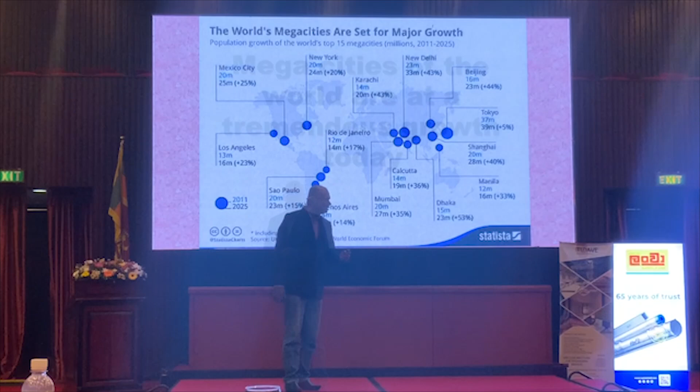Okay, so the good thing is, as Mr. Shuramal also pointed out, the mega cities of the world are at a tremendous growth today. So these are some of the mega cities. He showed what's happening in Colombo, but if you look at even New Delhi from 2011 to 2025, there has been 43% growth in New Delhi, and there has been 53% growth in Dhaka, and we have Beijing 44%. Even the developed countries like New York, we have 20% growth. So mega cities are at tremendous growth.

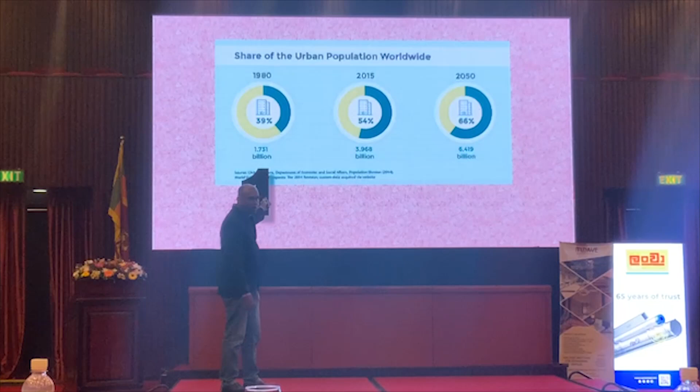And billions of people are today moving into cities. It's a good thing because knowing or unknowing, by doing so, these people are contributing to make our world a more sustainable place. So this is the world urban population. By the 1980s, we had 1 billion people living in cities. And 2015, or right now, we have more than 3 billion people living in the cities. And it is estimated by 2050 we will have 6 billion people. Look at the numbers, 3 billion now, 6 billion in just 25 years.

So by 2050, we need cities for 3 billion more people. Right now we only have 3 billion and we need cities for 3 billion more people. So it's just doubling the global urban population. And few people understand that this is the biggest force working on Earth today, the biggest force. All these bright dots in the world are cities, and they are going to double in size and grow twice in just 25 years.

So it's the biggest movement on Earth, and as professionals we have to make sure that we do it in a sustainable way. We direct these people, settlements and all in a sustainable way. Unless we do that, there's a problem. So we need cities for 3 billion people and we have to get it right. If we are not going to get it right, all these climate solutions we are talking about, we have the green building chairman here, all those solutions are not going to save the planet. So this is the most important thing, right?

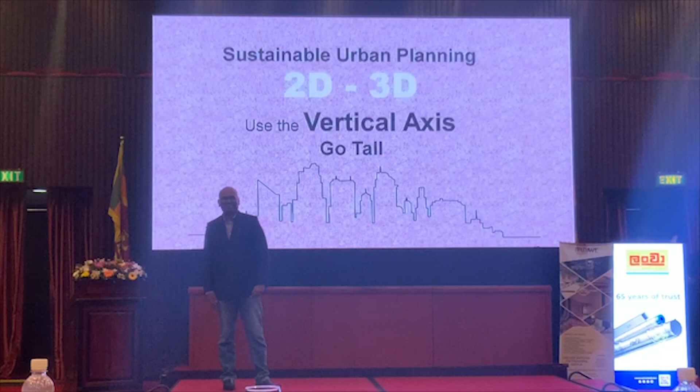So we need sustainable urban planning. And we cannot think about cities two-dimensionally as earlier we thought, just plans. We have to have 3-dimensional plans for cities. We have to use the vertical axis and we have to go tall. There's no other option. So that's why we need tall buildings today. So he's now happy. Okay, but the second question is, okay, we can go high, but how tall can we build? How tall can we build? What is the maximum limit? This is a 10-meter tall building.

It's a 10 meter by 10 meter cube. So if I make this 10 kilometer by 10 kilometer by 10 kilometer cube, I think everybody agrees with me. In this small cube, 3 people can live happily. It's a big cube. So if we scale it up like that, I think we can house all these 3 billion people we are talking about. So it's big enough to do that. But can we do this? Can we build this kind of a cube? Is it possible?

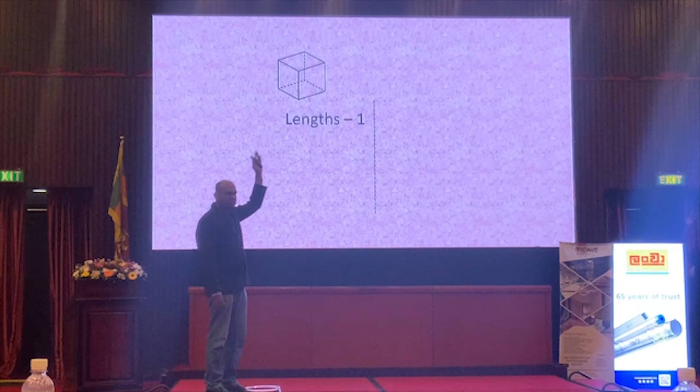It cannot be done. Why? It cannot be done due to a very, very fundamental basic reason. I'll explain what it is. So this is a simple cube. Its lengths are 1, whatever unit, it doesn't matter. And its density is 1. So the weight of this cube, I think everybody can calculate it. It's 1 by 1 by 1, that is the volume times the density. That's the weight of this.

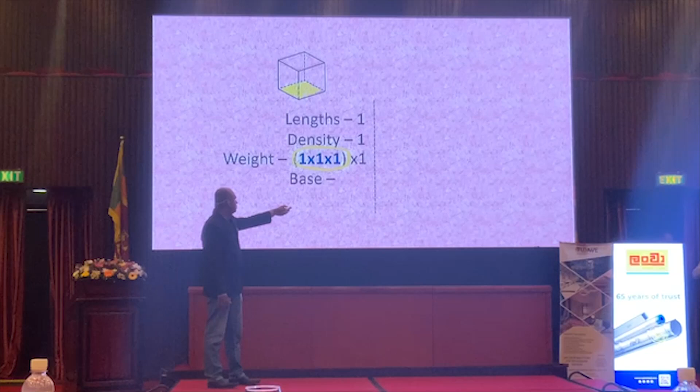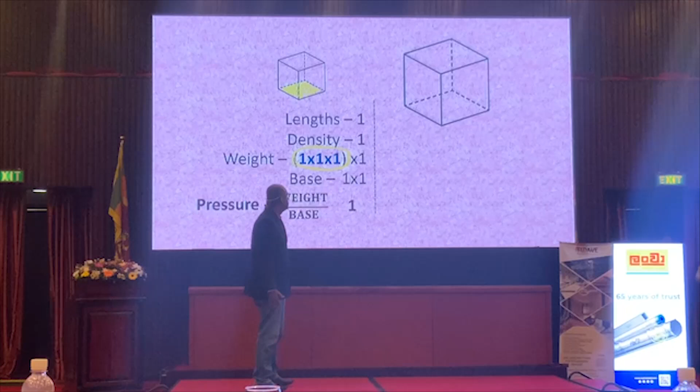And I'm talking about this base area of this cube, which is 1 by 1, it is 1. And I'm interested in the pressure. What is the amount of pressure that is going to be there at the base? So it's the weight divided by the base, and we get 1. What happens if I scale this up? If I make this bigger, 10 times bigger, let's say. If I make this 10 times bigger, the length is 10 by 10 by 10.

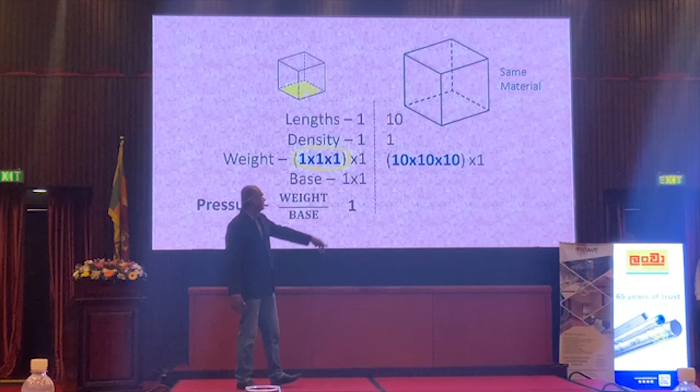And if you make the same cube of the same material, its weight is going to be, I have to press this hard, isn't it? Yeah, it's 10 by 10 by 10, 1,000. But the base size is only 10 by 10. So what happens? The pressure becomes 10. So you can see the same material, same structure. When you just scale it up, you get 10 times pressure on the base.

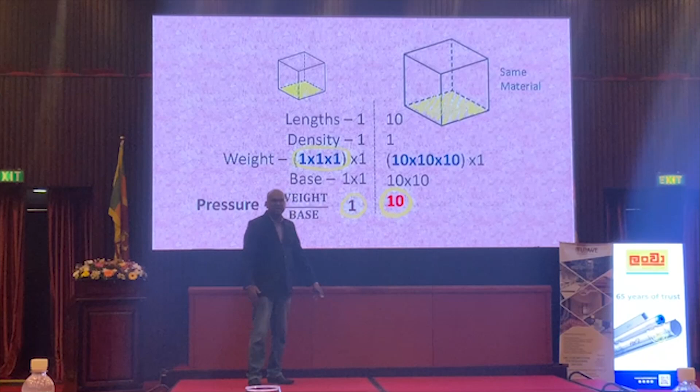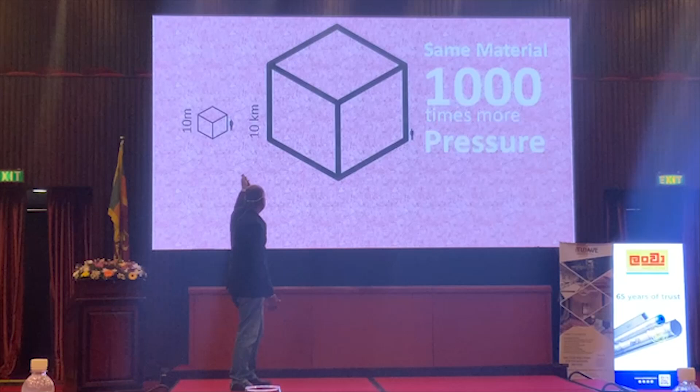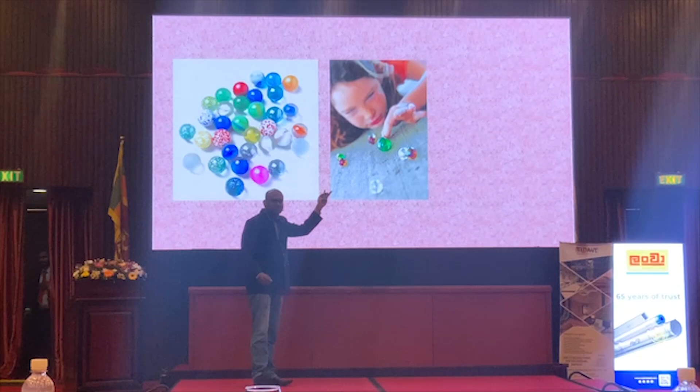So when you have this 10 meter building, when you scale up to a 10 kilometer thing, what will happen? We will have 1,000 times more pressure. If this is a concrete building, these foundations are going to have 1,000 times more pressure. So what happens? These things collapse. So we can't construct such buildings. I think you have played with these glass balls when you were small. When you drop it on a cement floor, it bounces up. What will happen if you drop this kind of a glass ball? It smashes into pieces. Why? Just because it is big.

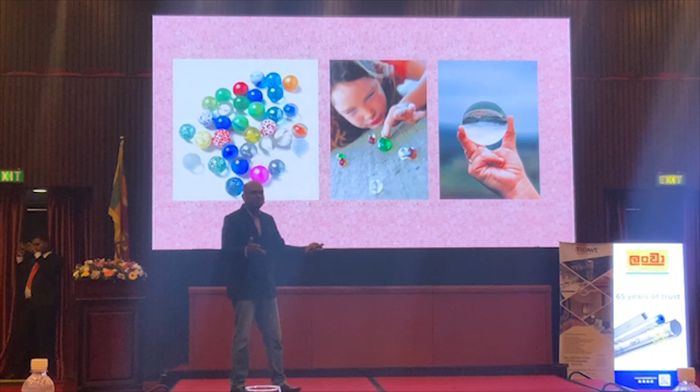So even if you look at a building, it's the same thing. A 1 meter building, I think you have made models like this at the university. You can make this kind of a fancy model, but you can't do it at 100 meter height. It collapses. Right. So therefore, designing tall is not easy. It's a difficult thing. Okay. So the reason is, when we are talking about tall buildings, we are working at the threshold of collapse. That's the important thing we have to notice.

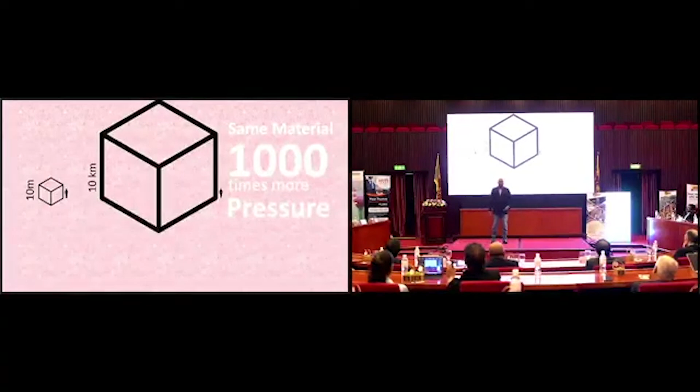Right, so architects can't do it. These kinds of things architects can't do. So 1,000 times, this 10-kilometer building, nobody can do. But we have people who can do, let's say, a 1-kilometer building, because breaking this pressure barrier is possible.

So for example, today we are bringing Professor Priyan Mendis, who is an expert on that, a world eminent scientist who has discovered high strength concrete to design foundations of tall buildings, and he has contributed to many world class buildings. So that's why I just pointed out this.

So that's the physical limitation of designing buildings, the physics limitation. Clever people like the Professor can handle that a little bit. But that's not the real limitation in tall buildings. In tall buildings, we have the efficiency limitation, or most importantly, what I call the sustainability limitation. So what is this efficiency limitation? It's very important to understand, so I will go a little deep into that.

So just think of a tall building as a bottle like this. This bottle we have to fill, and also drain off. Fill with what? We fill it with people, we fill it with water, and we have to drain off sewage. That's what we are doing with tall buildings. And the challenge is we have to do it in a given time called T.

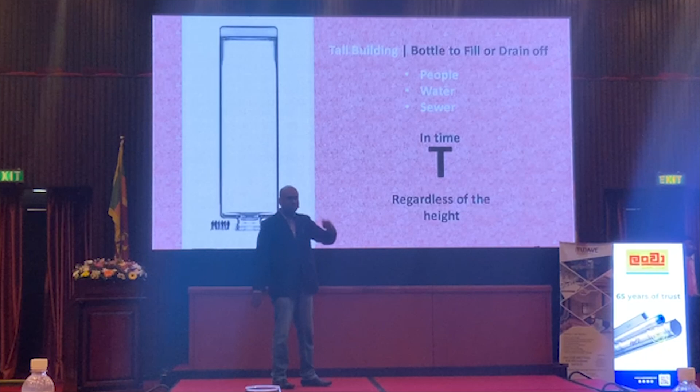Because my building is very tall, I am not going to go to the lobby and wait, let's say, 10 minutes till the lift comes, because I respect it's a tall building. No. Everybody wants to get to their office in 2 minutes, regardless of the height of the building. So T is a constant, we can't change it.

So this is the bottom area of the building, the cross-sectional area, I call it capital A. And let me number the floors: first floor, second floor, third floor, up to the nth floor. Then the volume we have to fill is A times n. It's clear for you, isn't it?

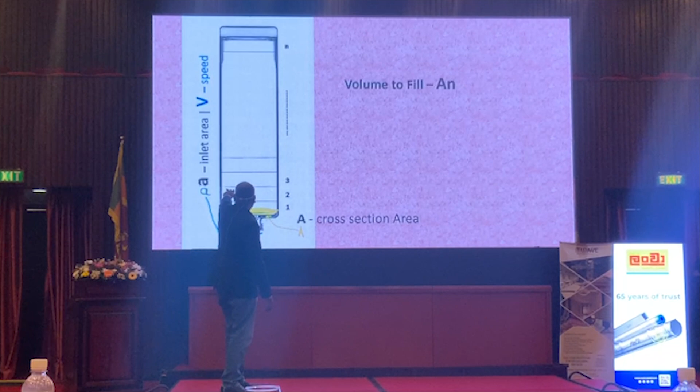This is the inlet of the building, where you put things inside. That area I'll take as small a. And the speed we pump things up, I'll take as V. So our flow rate is a times V. It's clear for everybody, I suppose.

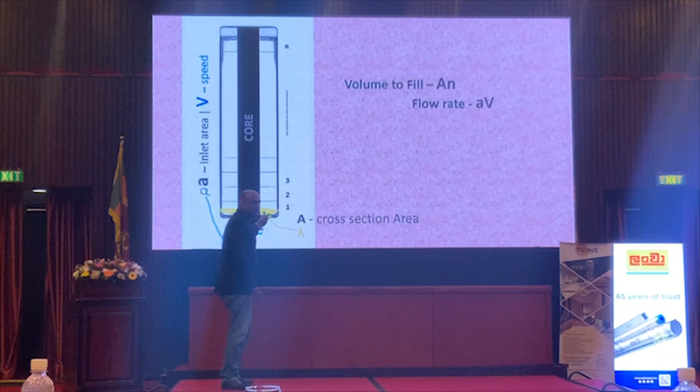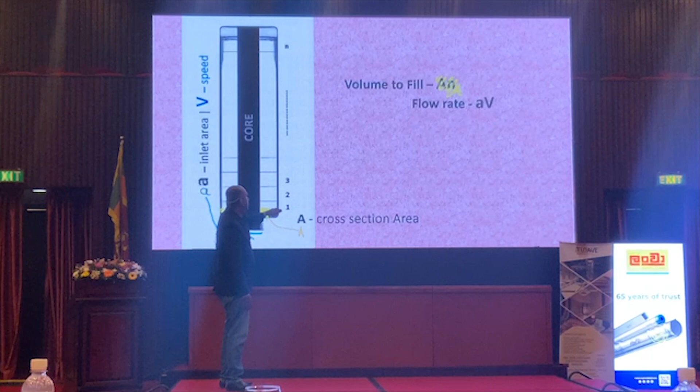But there's one difference between a bottle and a tall building: there is a central core. So you don't fill it like a bottle. You bring things through the core and then fill in. So it is not correct to say A times n is the volume to fill. It has to be capital A minus small a, times n, because we are filling only the sides.

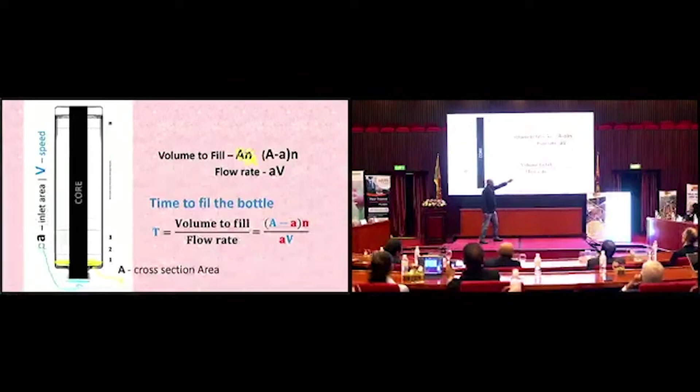So you can now calculate the time to fill the bottle. It's very easy: the volume to fill divided by the flow rate. It's (A minus a) times n divided by a times V. That's all, very simple. So let me keep this up there. I have just changed the order of it and taken the a out.

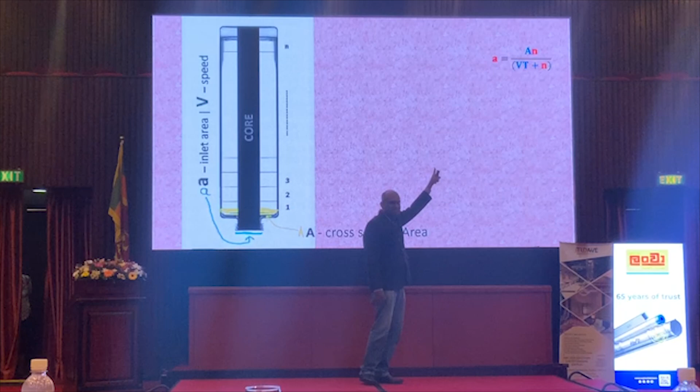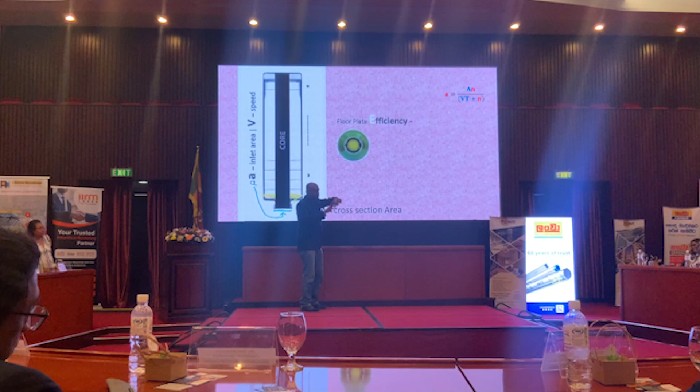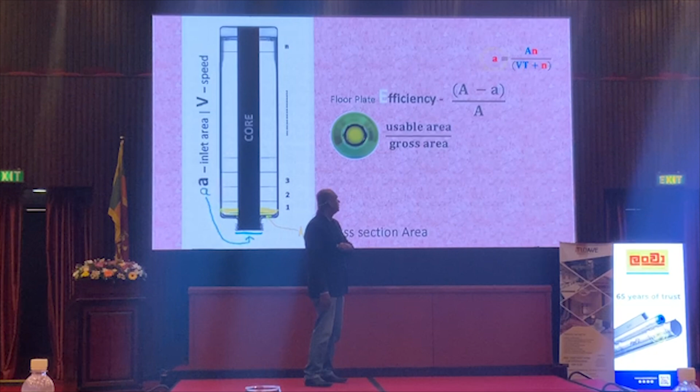I talked about this because I want to explain the efficiency of the tall building. It's very important. So the efficiency E is the usable area divided by the gross area, which is A minus a divided by A. So I'll take that a I calculated up there and put it here, and we get a very simple equation: E equals VT over VT plus n.

It's a very simple equation. You can work out the workings; I'm not going to do that, so you have to believe me that it is so. So what does this equation tell us? It tells us something very, very important about tall buildings.

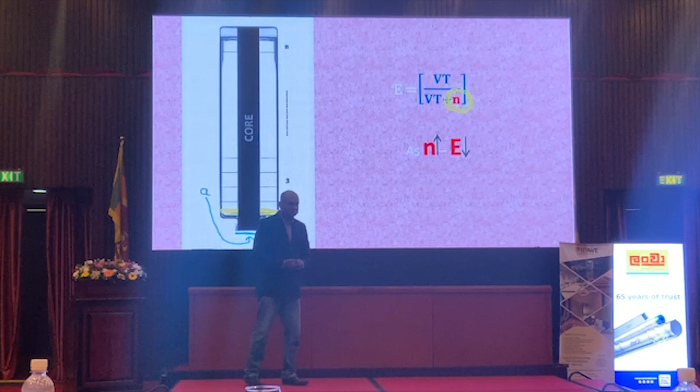When the N increases, the efficiency goes down because they are inversely proportional. That's something simple. When you look at this, you can very simply understand. As the height of the building goes up, tall buildings become gradually inefficient, little by little. But that's not the most important thing. There are other important things you can look at when you look at this.

Where is this A we were talking about? The cross-sectional area. It's not there. So what does that mean? Regardless of whether you have very large land or a small land when building a tall building, it doesn't matter. Efficiency is efficiency. So whatever the building you build, efficiency is going to go down. It's a very drastic thing about tall buildings.

And then this is something very important. How to increase efficiency then? If you are going to do a tall building, the only way is we have to work with this thing called Vt. T is a time, V is a velocity. We bring people, water, those kinds of things up the buildings. Here we have to increase it substantially because this Vt is upstairs and also in the denominator. So it's not a direct relationship. We have to increase it sufficiently and substantially, and that is not so easy to do. It's very difficult to increase the efficiency.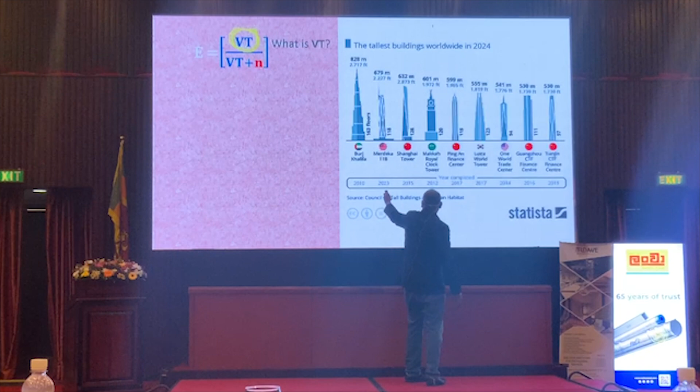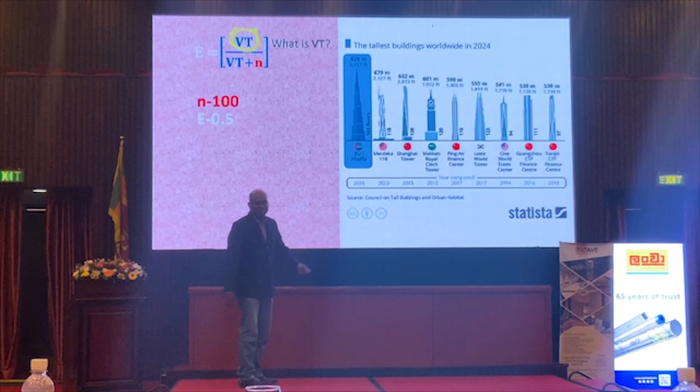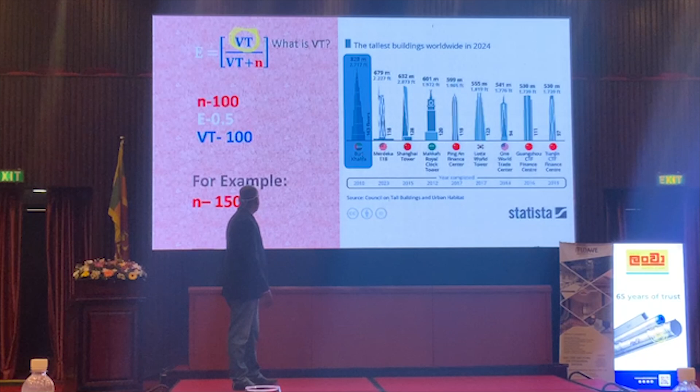So if you want, I can calculate this Vt very easily in front of you. These are the tallest buildings in the world. Let me keep this Burj Khalifa out of the picture for a while. All these buildings have 97 floors, 111, 94. I'll take it as 100 floors. And I know the efficiency of these buildings is about 50 to 60%. I'll take it as 50, and when you put these numbers, I get a number for Vt. It is 100. A very simple number. Now you can use this to, for example, calculate the efficiency of a 150-floor building. If you put the numbers, you will see it's only 40% efficiency.

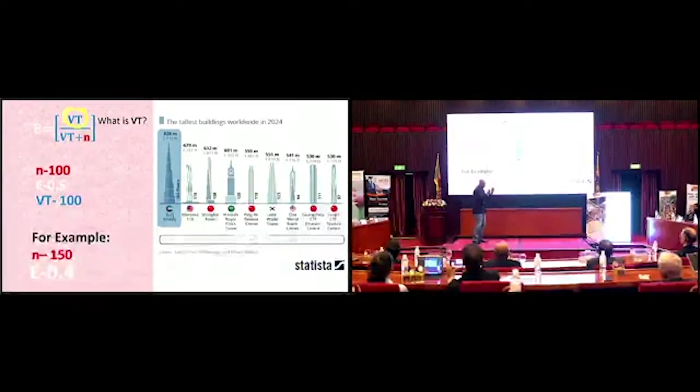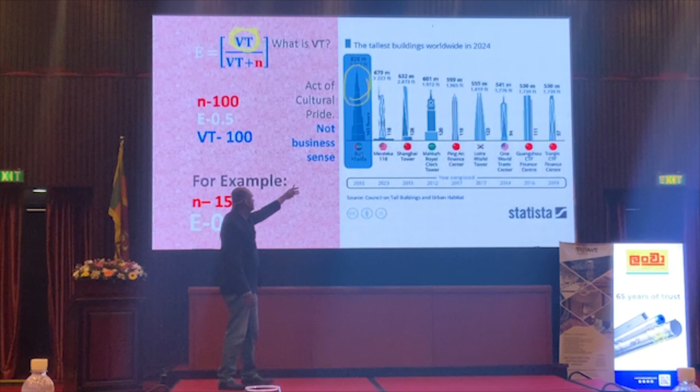Burj Khalifa, I left it out because its form is different. It's a cone form. Actually, its efficiency is much less than a normal tall building. A professor has worked on this. This top part, if you calculate it, is highly inefficient. So it's not a business sense building. It's actually a cultural pride. Just to say we have the tallest building in the world, it's done like that.

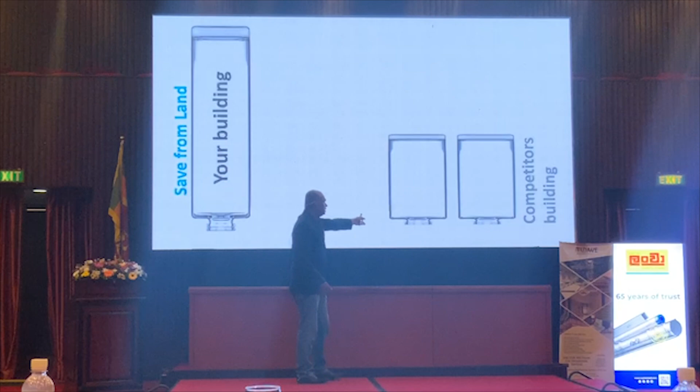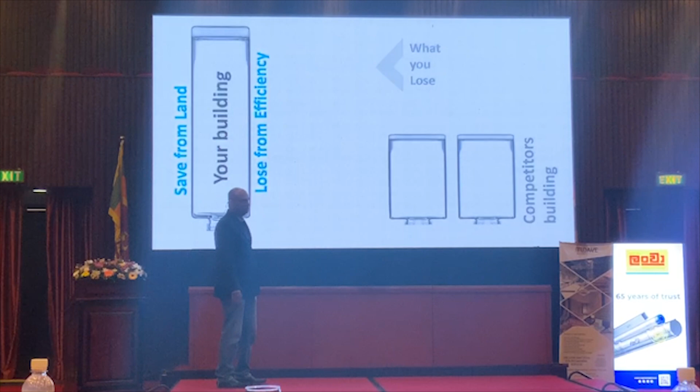So in simple words, we'll just forget mathematics. This is your building, and this is your competitor's building. Two buildings, the same usable area, and you save from the land. When you're doing a tall building, your competitor is using a large amount of land, and Shirom will explain that. You are using less land. But you lose from efficiency. That's the problem we have. When what you lose is much more than what you gain, you lose. It's so simple. You lose in terms of business, and even in terms of sustainability. So that's the failure of tall buildings we see.

And although we, CTBUH, also boast about tall buildings, the super talls always fail. We have Nakheel Tower, 200 floors. Professor, has it started construction? No, just on the drawing board. We have Sky City Japan, 196 floors, just drawing board. Nothing has happened. And we have Jeddah Tower: they started, did the foundation, stopped, restarted, and once again they had to stop it. We have Dubai Creek Tower, 160 floors, started, and as far as I know it's stopped. I could show some examples in Sri Lanka as well, but I shouldn't. So there are a lot of projects like that.

So as far as we know, the super tall always fail. The reason, I think most of the people in the world don't know, but now you know what the reason is. Okay, so going vertical is a challenge. So that's why I just explained this. It's a challenge, and that's why we brought an experienced person like Adrian to tell us how to face these challenges in tall buildings and also convert these challenges into opportunities.

So we were talking about this efficiency limitation. Is this an unbreakable deadlock? So as human beings, can't we build more than 150 floors? Are we stuck there? How to break this barrier? I think it's possible to break it. There's a way of doing that. The problem we have is we are always thinking about having the inlet down there. That's the problem. So it need not be there. It can be up there or even up there.

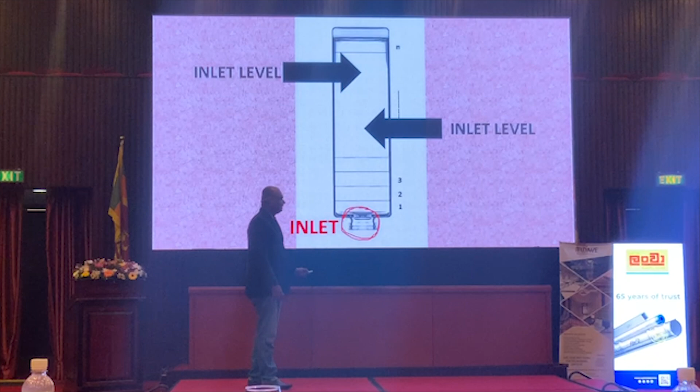So let's think this is a set of tall buildings, and this is the notion of ground. It need not be down there at the bottom. It can be up there. And what do you mean by the ground? What I mean by ground is where I go home, where I go down to go home. It need not be there. It can be somewhere up there. It is where I run when there's a fire. So it need not be there. And it is where all the services come. So it can be here or there, wherever it is.

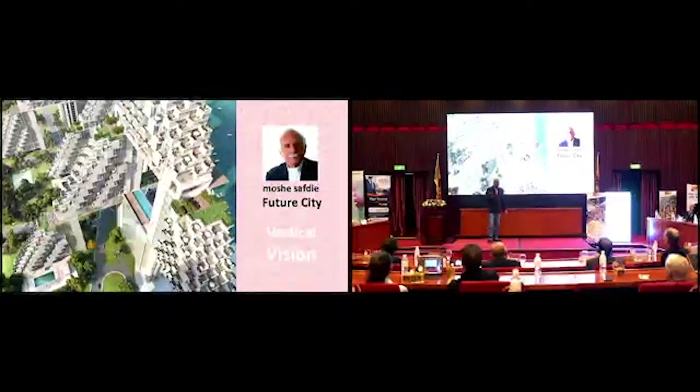So that's the concept behind this Moshe Safdie's concept of future city. It's a very popular concept, but it was never built because I think he didn't justify it as well as I did today. Otherwise it would have been built. So the idea is you have grounds at several levels. Here you have a ground level, up there you have a ground level where you go out, where you play, you have trees, you have roads, everything. So it's a multiple layer of city. So the way to go high is not individually building tall buildings, but as a city together we have to grow. So that's the way to go up.

Orbital ring habitat is not just a fancy dream like the space elevator kind of thing. This is practically possible. If you calculate it, it can be done. The thing is whether we have the motive to do that. So in future it might happen, I don't know. But it's a great vision. So it will be the next leap of vertical vision of humanity. But we have, I think, greater visions. People talk about the Dyson sphere, where people build a structure surrounding the sun and capture the entire energy output of the sun. So that is far away in future. It might happen.